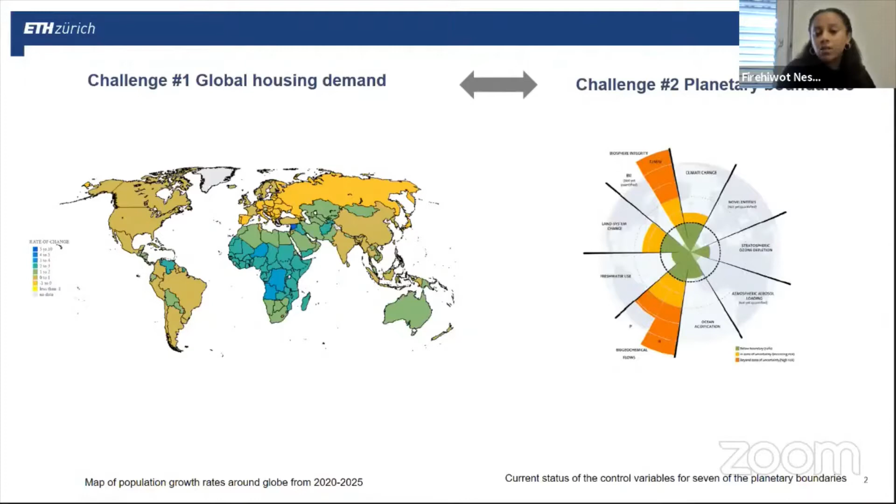We mainly consider two main challenges that we want to address in this technical report. The first one was this global housing demand. Many presenters have talked about housing demand that's on the rise, predominantly felt in African cities. On the other hand, we have planetary boundaries set out to be the safe operating space for us, and we're managing to surpass those boundaries by the day. So the question we had was, how do we bridge this housing demand and also the planetary boundaries we have to take into consideration?

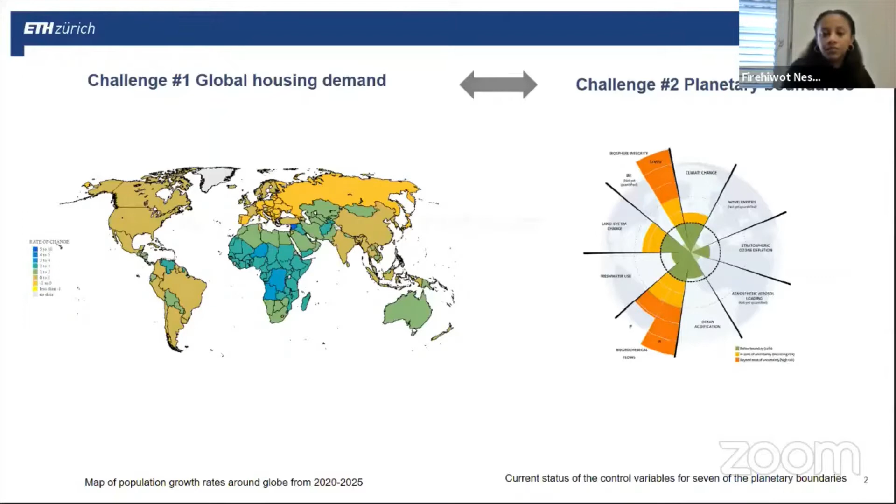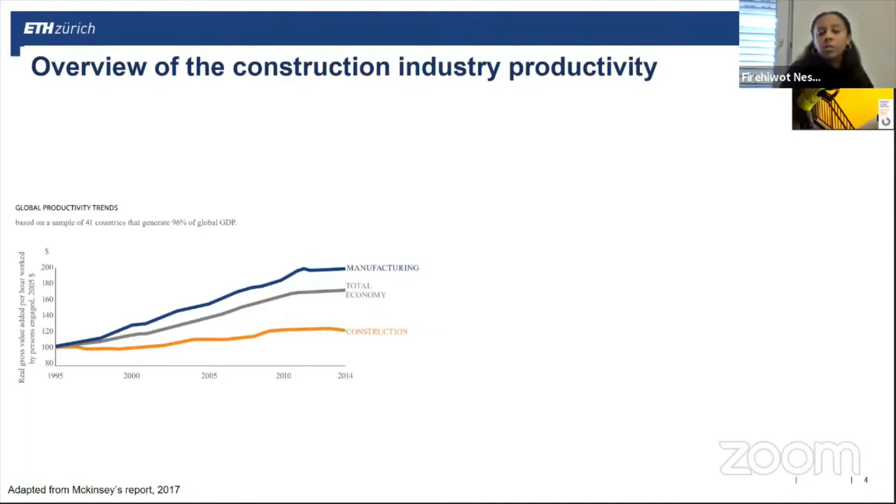So you've seen it already on the title, we're talking about industrialized construction. Why? The main reason is that the current construction industry has a very low productivity rate. You can see it on this graph here, it's much lower than the total economy growth and also the manufacturing industry. That's why we're not managing to supply enough housing to this growing housing demand. Some of the reasons are external forces, and some are firm level operational factors behind the slow productivity rate, and I just mentioned two of them.

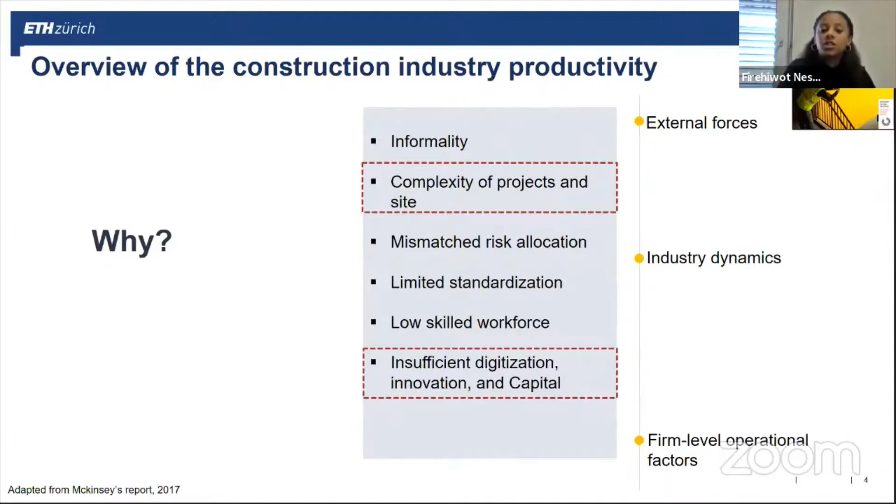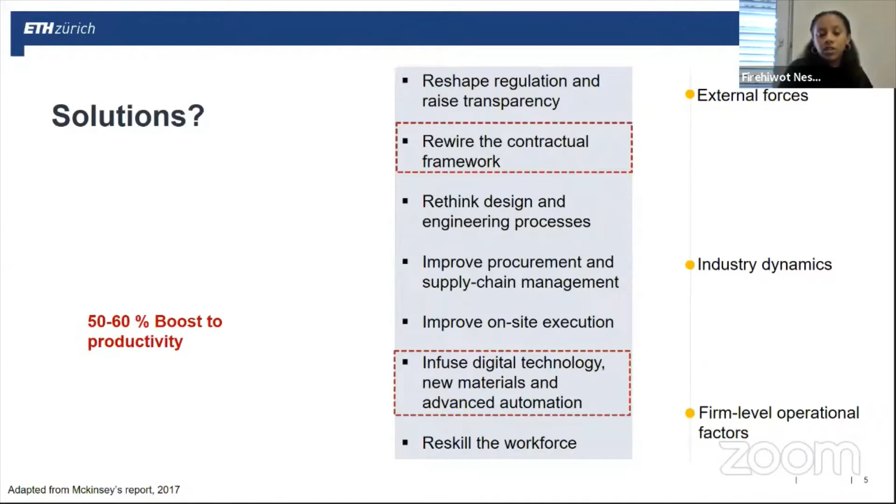We know that construction projects are very complex, and our construction sites are also as complex. We also see that there isn't enough digitization, innovation, and capital going towards this construction industry. Some solutions proposed by certain companies or consultancy firms include rewiring the contractual framework between stakeholders, and infusing digital technology, new materials, and advanced automation. Together these would give us about 50 to 60% boost in productivity growth in construction. It also means we have to employ more manufacturing-like systems of mass production, industrialized construction in the industry. So industrialized construction is not the whole solution, but part of the solution for alleviating housing demand.

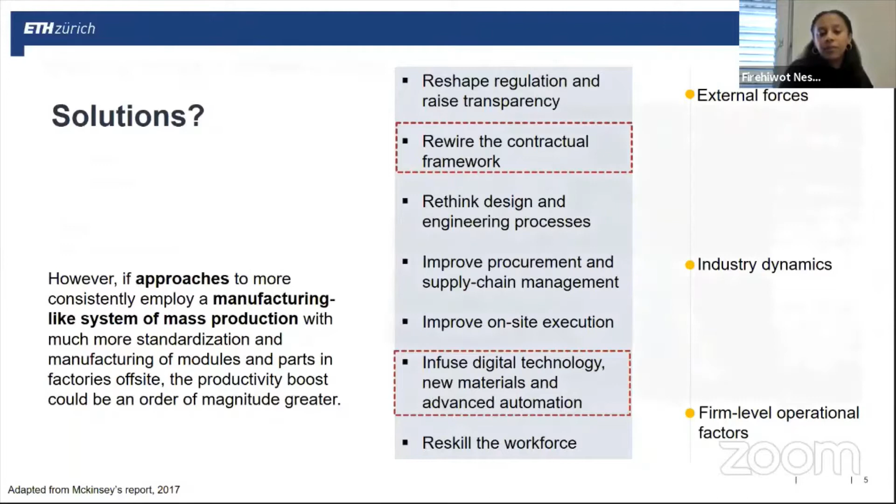So what is it actually? Industrialized construction itself is an umbrella term for prefabrication, pre-assembly, modular construction, and things like that. In summary, it's moving away from this project mindset that we have in conventional construction towards a more product-oriented platform.

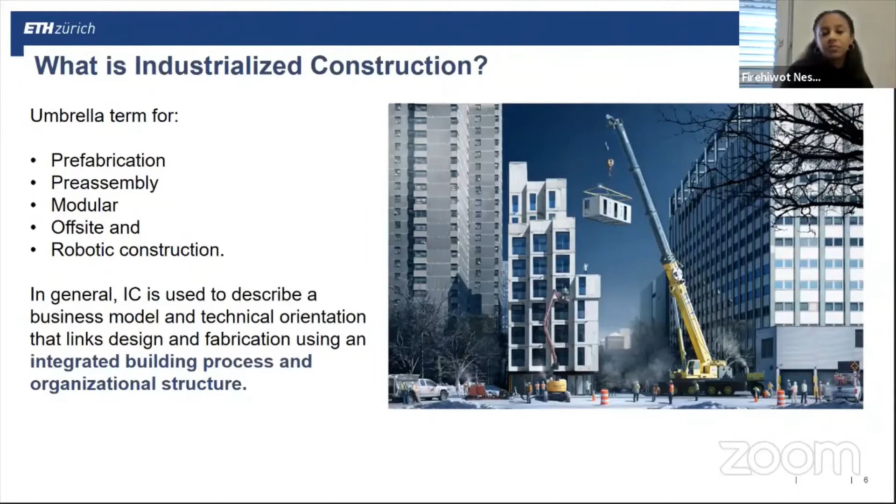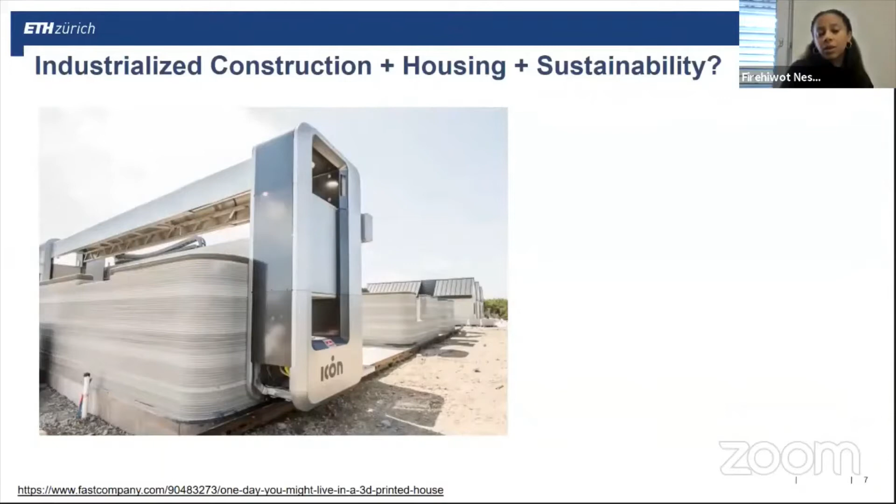There's already talk about industrialized construction and housing and sustainability, and I want to go through this research premise that we had in this research report. We see an improvement in construction safety, quality improvement with IC, or industrialized construction as we call it. It's weather independent, and we also see higher predictability and shorter execution time.

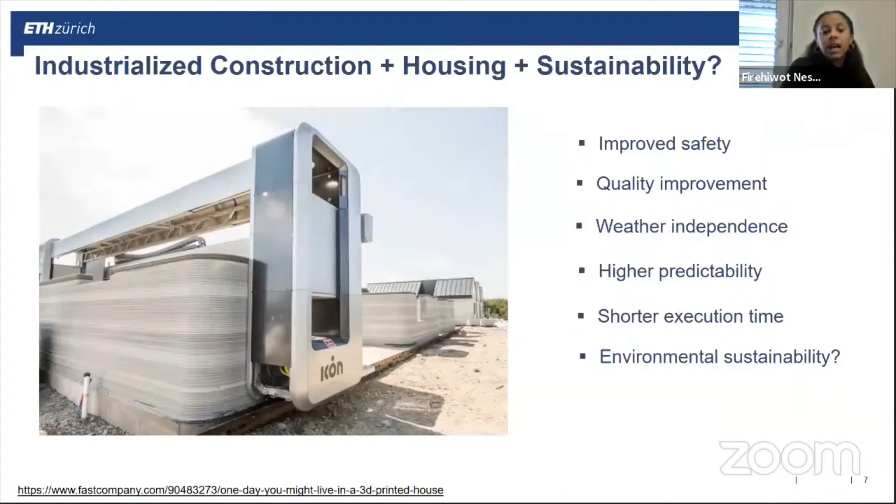But what about environmental sustainability? Thankfully, there have been several research studies indicating its potential to provide environmentally sustainable products. This is a summary that's also available as research online, you can check it out. We managed to summarize the environmental sustainability potentials of industrialized construction.

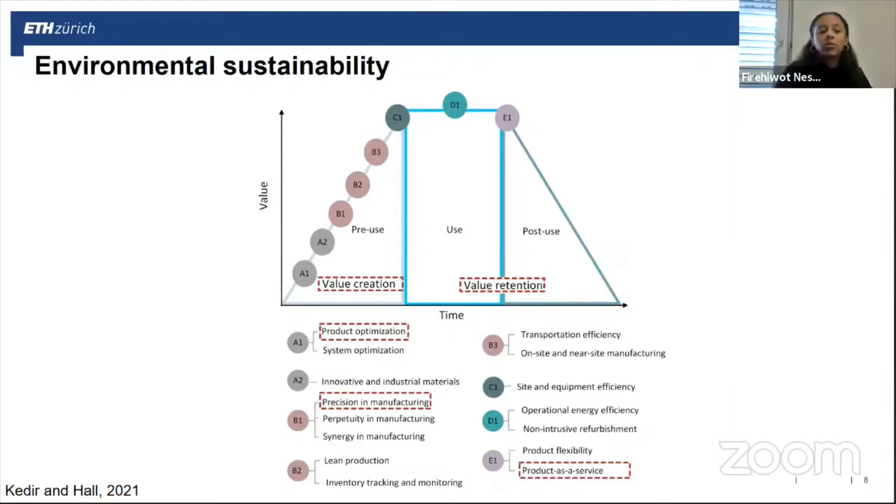Quickly going through it, in the value creation process of an industrialized construction product, from the selection of materials until delivering to the product's user, we see benefits such as product optimization. There's higher use of digital tools, and we can start thinking about optimized designs in our products. We also see precision in manufacturing, where we manage to lower the construction waste seen in conventional construction. On the other hand, we have the value retention processes, such as the use and post-use phase, or end of life as it's mostly known. We have a potential, for example, to have business models such as product as a service, where companies think about producing something that could be returned back after its use.

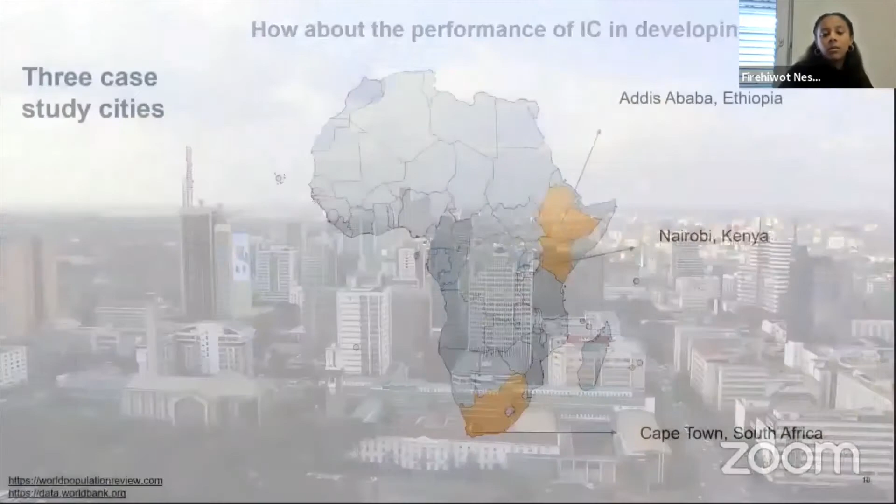So having all of that in mind, the main question here is, how about the performance of industrialized construction in developing economies? We looked at three main cities in Africa - you can see Addis Ababa, Nairobi, and Cape Town on the list here. And we had two methodological approaches to evaluate whether the performance of IC in developing economies makes sense.

The first methodological approach is life cycle impact assessment. We identified several products that we see in these three cities and did a life cycle impact assessment on the product and construction process stage, evaluating the global warming potential of these products.

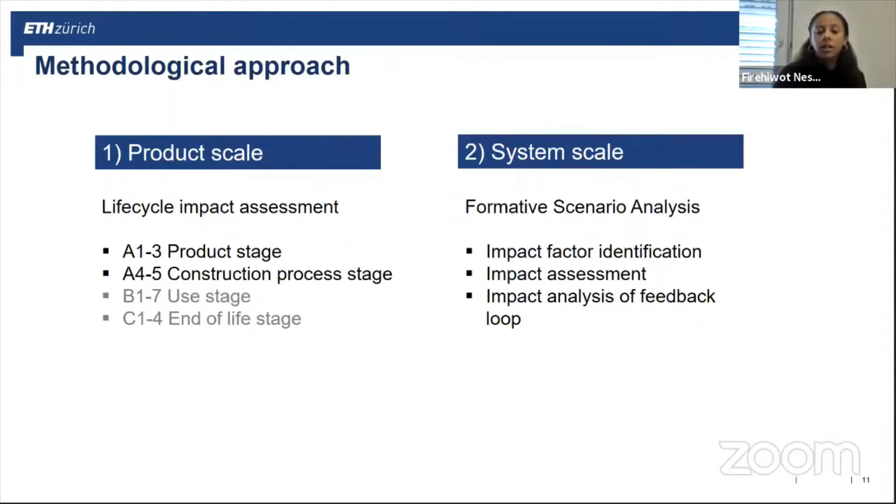The second methodological approach was to look at the system in general, in the context itself. We had a formative scenario analysis as a methodological approach and identified key impact factors that are really relevant in the adoption of industrialized construction in the cities.

So I'll start with the product scale assessment. Currently the conventional way of constructing housing is seen with this specific material that we also heard from Wolfram beforehand, that it's already predominantly applied in developing economies, which is concrete. Of course cement is the most impactful component, but I'll just call it concrete here so we have the same understanding. So here we see concrete as the main construction material used.

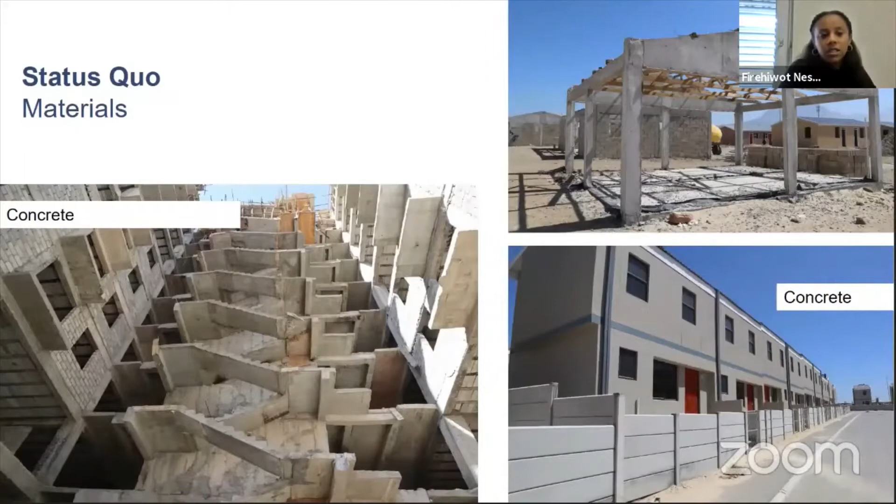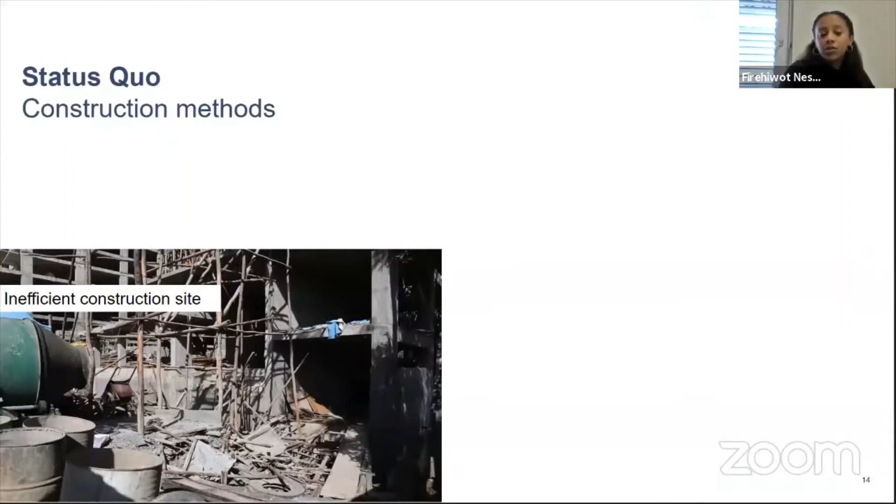We also see that the construction sites are inefficient, which is also an indicator that the productivity rate is much lower because of this inefficient construction site. There is an enormous amount of waste created in this construction site, and there are also unmet quality demands, which is not preferred in the eyes of the user, but also in our structures we do not want unmet qualities.

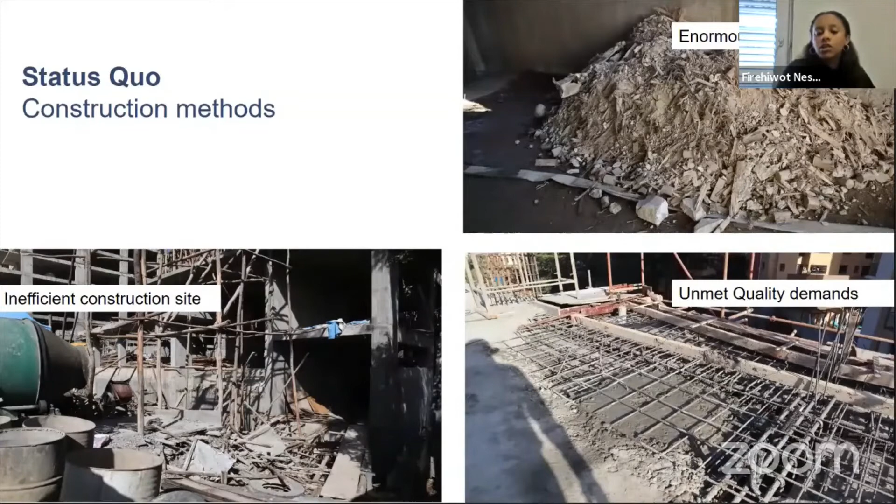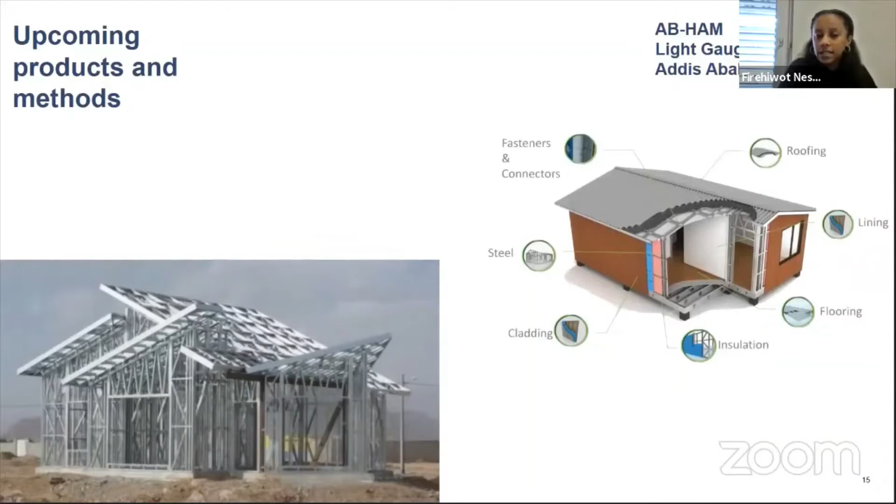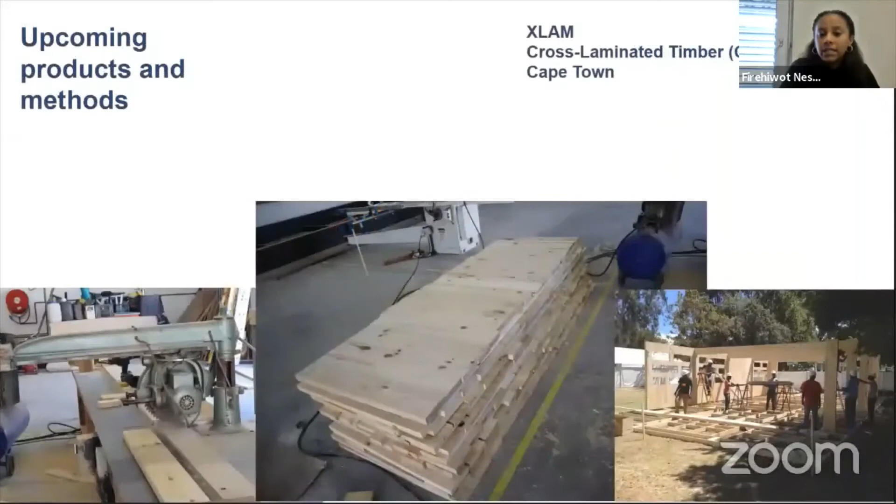There is also some hope. Of course, we see some upcoming products and methodologies. I want to show three main products here. One is the use of light gauge steel that we see in Addis Ababa. There is also expanded polystyrene applied in Nairobi. The third one is cross-laminated timber, CLT, in Cape Town.

We identified about 20 products similar to those I've already shown, and we categorized them into three construction methods. The first is conventional construction, where we categorized conventional materials such as concrete, and the construction method in this case is mainly done by skilled labor force, without much prefabrication or pre-assembly like in industrialized construction.

On the other hand of the spectrum we have fully industrialized construction, where we see innovative materials such as light gauge steel and the like, and low use of skilled labor on site. In between is partially industrialized construction, where we see a hybrid between the conventional and fully industrialized construction.

A quick show of some examples of the products we identified. The first is conventional concrete masonry, mostly applied in Addis Ababa as a wall element. The second example is partially industrialized construction: we see expanded polystyrene sandwiched between shotcrete finishing elements. And on the other hand, fully industrialized construction with light gauge steel.

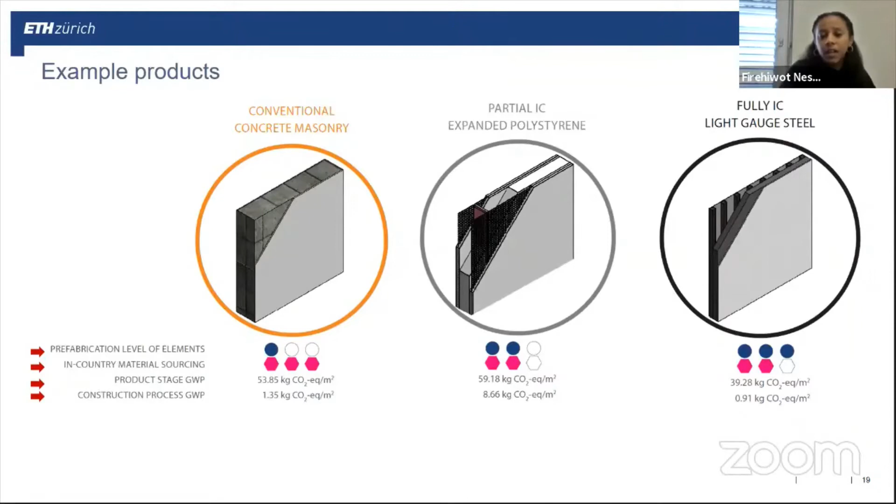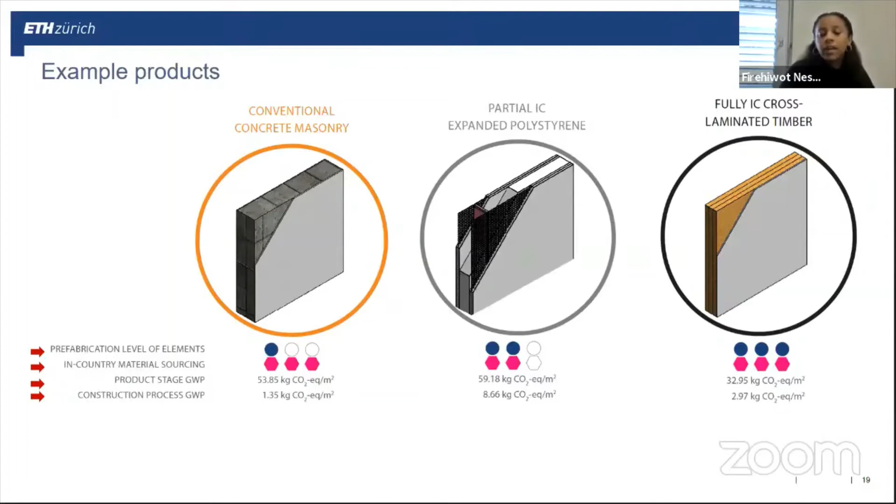A fourth example I wanted to show, also very new in these cities, is the use of cross-laminated timber. We see again that the product stage impact is much lower because of the use of timber, and the construction process stage also does not have a big impact in this specific example. Of course, these examples come from different cities, so we need to pay attention to the specific context each is applied to.

So I just want to go through some key points from the analysis of the life cycle assessment. We know that the type of material used plays a big role, and we need to pay attention to what type of material is applied with industrialized construction.

We need to think about primary material savings, such as design optimization, or also reducing construction waste.

We see that transportation of materials and products also has an impact. Of course, not as comparable to the product stage impact, but we have to think about whether these materials are sourced from the country or are sourced from outside.

The fourth point is that the factory processes, of course, with industrialized construction, we're introducing other processes such as factory processes, and we have to think about whether our energy sources are sustainable or not.

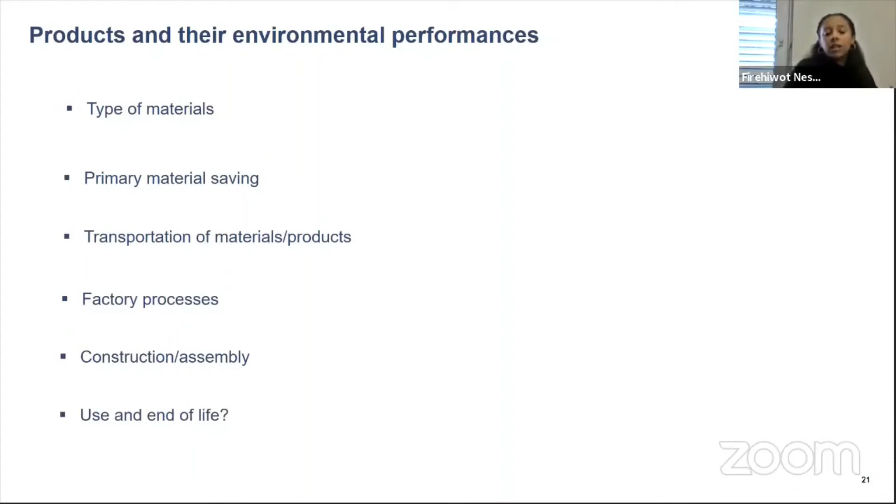As I mentioned before, the construction and assembly process also has a potential to be lowered with industrialized construction processes. As I mentioned before, we only did the product and construction process stage impacts, and we didn't actually evaluate the use and end of life, but it's also an important point to point out.

So moving towards the second methodological approach, which is the system scale. Here, through interviews and through literature review and seeing examples from other countries that have already applied industrialized construction in their industries, we managed to identify 6 key impact factor categories, and 19 subcategorizations.

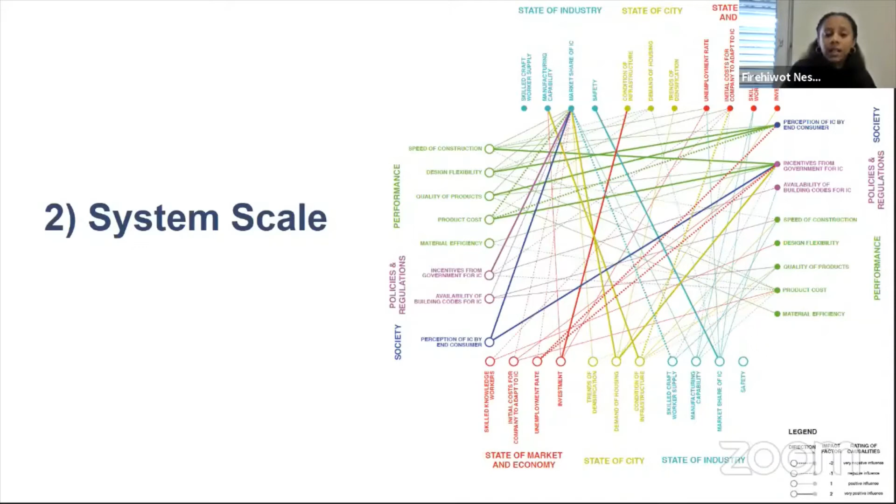So I want to go through some of them as an example. The first one is product performance. So of course, we want to see that the industrialized construction products are competitive, whether the quality meets the demand, time, design flexibility, material efficiency, and product cost, which is under the umbrella of product performance.

And we have the second impact category, which is state of industry. So here, as an example, we have manufacturing capability. As I mentioned before, some of the materials are not actually manufactured in country, and this plays a role in companies trying to introduce new materials. So we have to think about whether these cities are ready to actually produce and manufacture some of the materials.

The third impact factor category is state of city, and here we have trends of densification. We saw there is some correlation between high-rise buildings and application of industrialized construction, and in most instances we see industrialized construction performs better when constructing high-rise buildings.

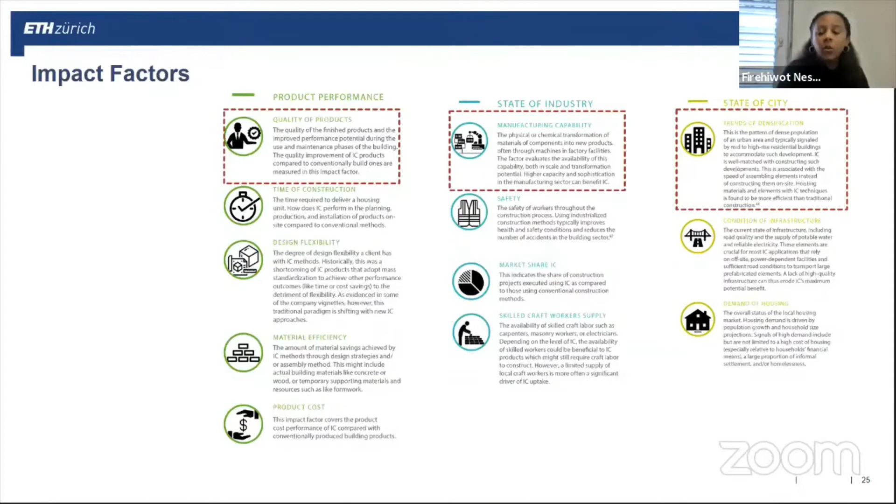The fifth one is policies and regulation. Here, as an example, we have availability of building codes for industrialized construction. Most of the building codes that we see in the cities are more prescriptive, and not performance-based. We need to check whether we are actually matching this move towards industrialization, and whether our building codes are also coming along.

The last one is society, and we have perception of IC by the end consumer. Of course, at the end, the user gets to decide whether they would like to purchase that specific product. So we have to think about whether that product meets the standards of the consumer.

So after doing some systems analysis of these 19 impact factors, we plotted them on a system graph, and you see here there are 4 categories: active, buffering, passive, and ambivalent, and these are the roles in the system.

So as an example, we see here condition of infrastructure in the specific cities as an active factor. Condition of infrastructure involves the availability of water, the availability of electricity, and quality roads and things like that. So when companies think of creating an industrialized construction manufacturing facility, this is something that they really consider. So we have to look at our condition of infrastructure in African cities.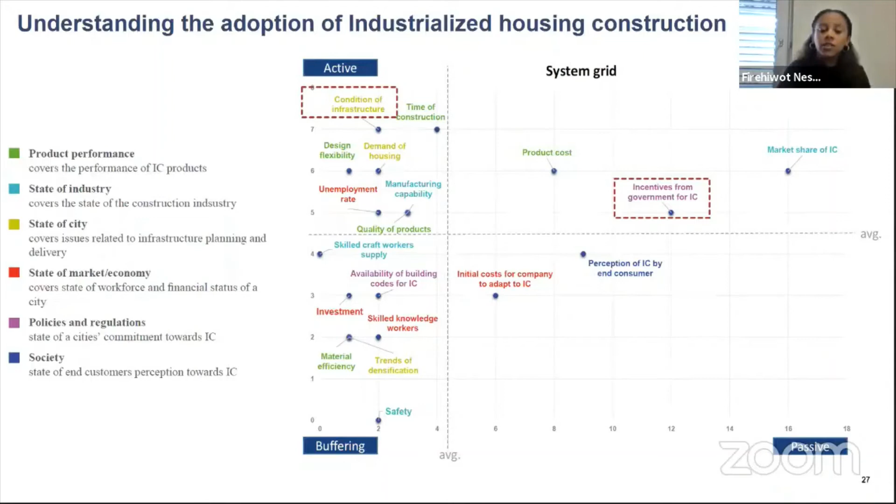On the other hand, we see incentives from government for industrialized construction having both an active and a passive role, which is under ambivalent. And we need to think about perhaps boosting some of these companies that are trying to introduce innovative materials and methods in the specific cities.

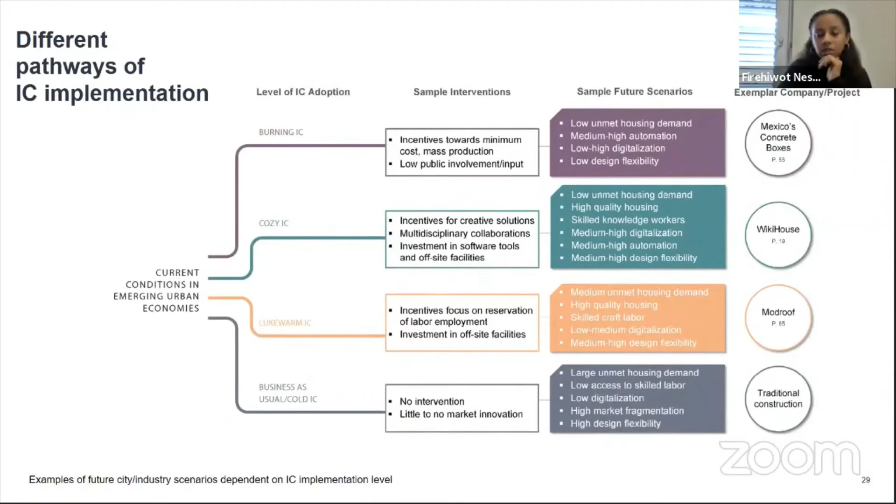So finally, we tried to show four ways industrialized construction adoption could take place. The first one is business as usual, showing if we leave the construction industry as it is, with no intervention from the government or private companies, we would still have large unmet housing demand going forward. Perhaps what we have is high design flexibility.

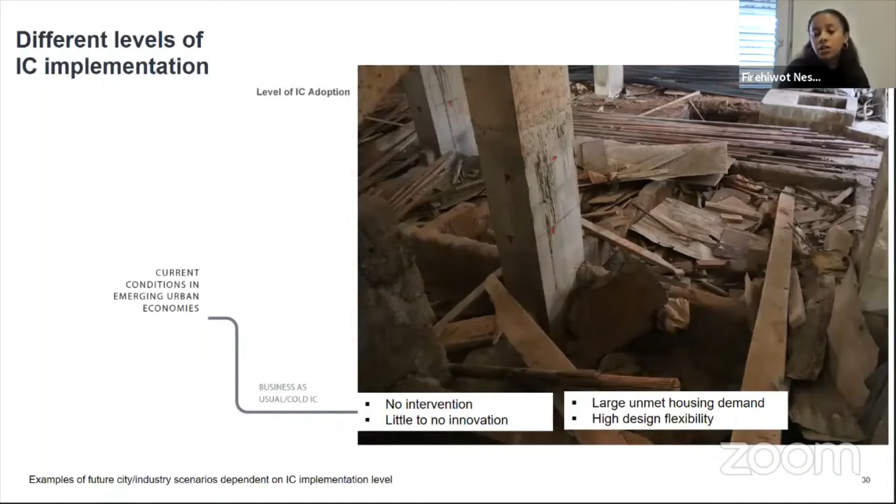The user gets to decide how they would design their building and which material they use and the like. The second level is this lukewarm industrialized construction adoption, applying some innovative materials in some parts of the building. Here you see the roof having an industrialized construction product. On this scale, we have medium unmet housing demand, as we're not doing the whole housing with industrialized construction methods.

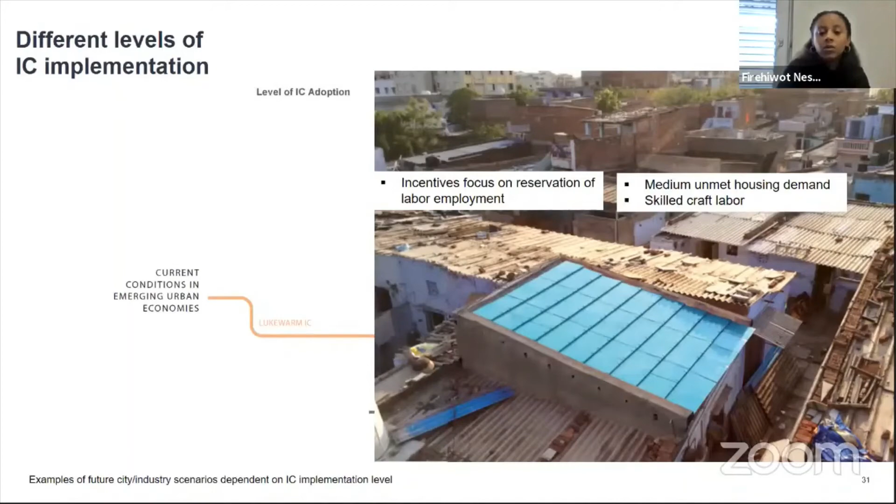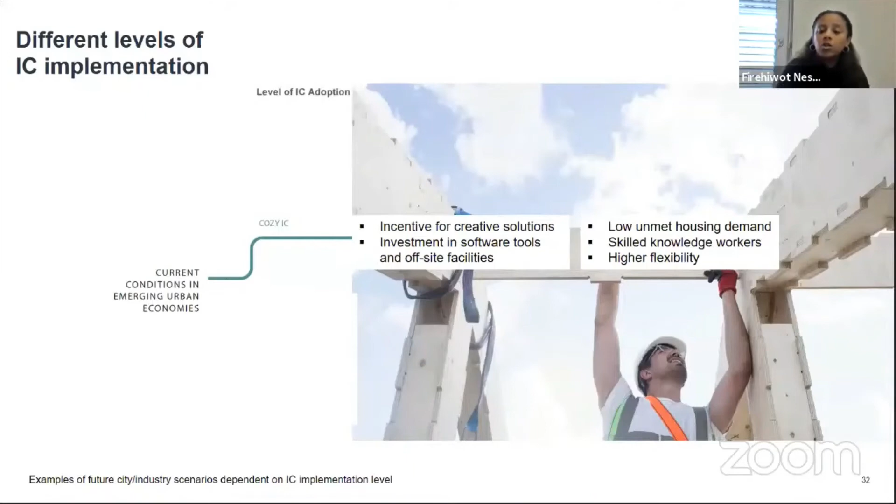What we have as a positive here is perhaps we promote skilled craft labor, and we don't completely change the construction processes. The third level is the cozy adoption of industrialized construction. Here we go forward with incentivizing innovative construction methods, giving incentive for creative solutions, software tools, offsite facilities, and the like. We end up with low unmet housing demands, and we also promote not just skilled laborers, but skilled knowledge workers, and perhaps higher design flexibility.

The last level is this burning adoption of industrialized construction. Without really giving context to the application, we might end up with just one benefit of industrialized construction, which is mass production, and we would not be involving the user as much. Perhaps we will be having low unmet housing demand, but the perception of the consumer might not be positive at the end, and low design flexibility is also a negative factor.

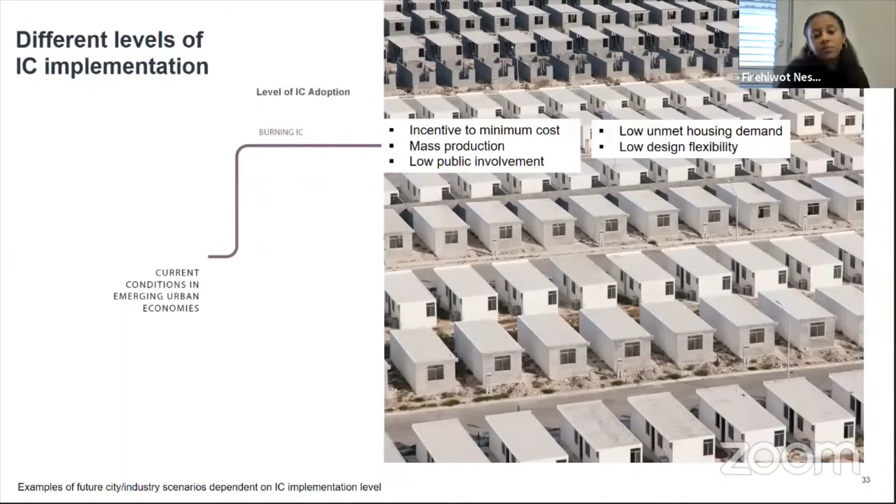So at the end, our framework was to think about the context of the cities, think about what are the product aims we want to have, think about the levers that we have to change the industry, and think about the actions that we could do to move with these levers.

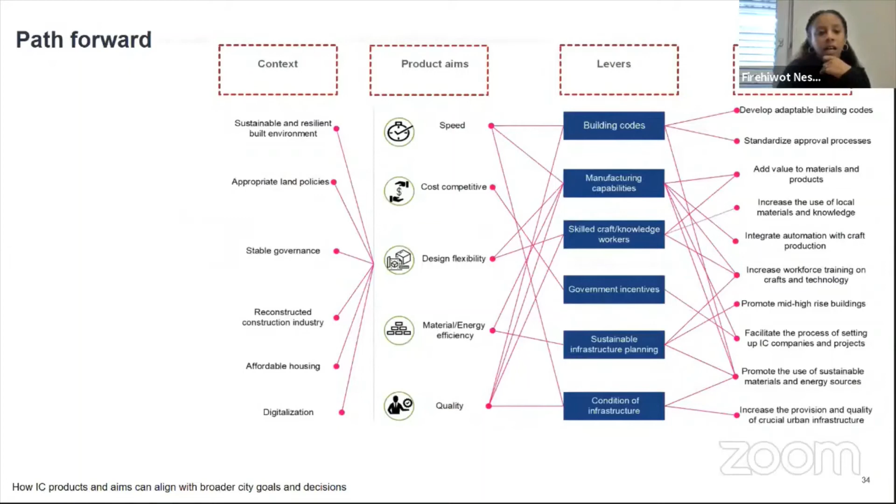As a summary, I have here a note to say that this report tries to show this intricate ecosystem of adopting industrialized construction in a sustainable way in developing economies, and hopefully it's kind of a report that makes the decision processes of stakeholders easier.

Thank you very much, and open for discussion.